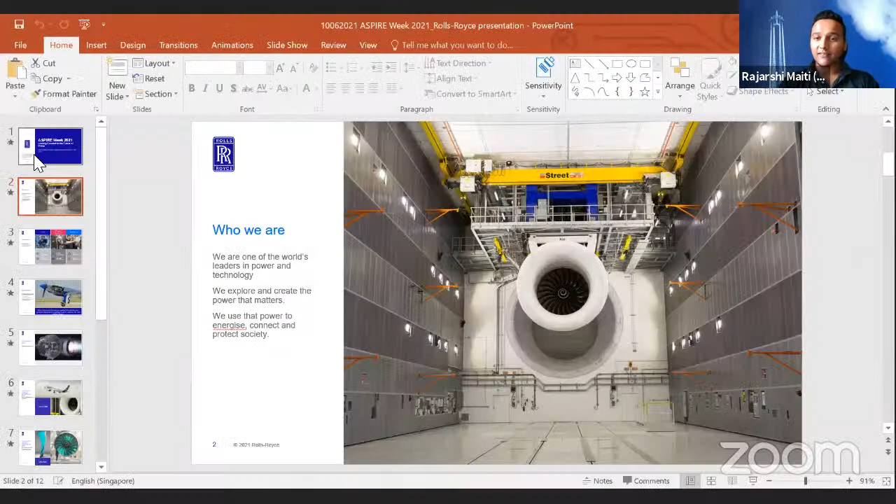I am genuinely excited to share about Rolls-Royce and, more importantly, about the future of flying, because I think that is something that is quite exciting that's going on. First and foremost, I would like to thank Aspire for giving me the opportunity to be here. And it's quite encouraging to see so many people excited in STEM.

And I hope today I can, well, not aspire, but inspire you guys to push forward for a career here. And I will be very happy to take any questions.

So let me just give you a bit more about myself. As you guys just heard with my conversation with Johnson, I joined Rolls-Royce 6 years ago. So I have been working here, and there have been a lot of changes in the things we do. We have moved across technology.

So like we talked about, there is a lot of innovation. But in terms of innovation itself, I think the things that we look at do change, because that's what the need of the hour is. I joined Rolls-Royce as a fresh graduate from NTU Aerospace Engineering, and before that, I was in Singapore for about 15 years.

Okay, so let's get started. Before I move on to technologies, can I just check... actually, maybe it's a bit more difficult, and that's one of the things I really miss about these new times, that I would have been in person together with all of you, and I could ask you all to raise hands. So I'll skip that bit.

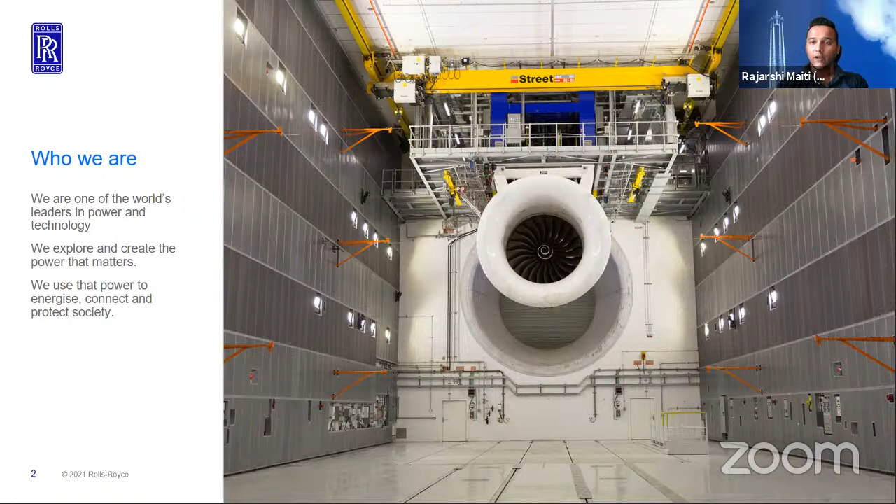On the second one, we have Rolls-Royce Power Systems. These basically provide engines for industrial usage, which means they can be on marine businesses or even industrial gas turbines. So at the core of the technology, it is still generating power, just that that power is not utilized for flying aircrafts, but for other purposes. And finally, we have our defense business, where we engage with the military to provide propulsion for their aircrafts. So that is also one of the other big parts of our business. So that's where we are as Rolls-Royce.

But when we say better power for a changing world, what do we mean by that? The challenge in this changing world is that the activities today are extremely focused on sustainability, on green power, and environmentally friendly solutions. And that is a big challenge. If you know, recently there was the G7 summit, and environmental and sustainability was also a part of the conversation. So for Rolls-Royce, it's always been about making sure we have a long-term strategy to move towards a sustainable aviation future. And that's what we are here to talk about today.

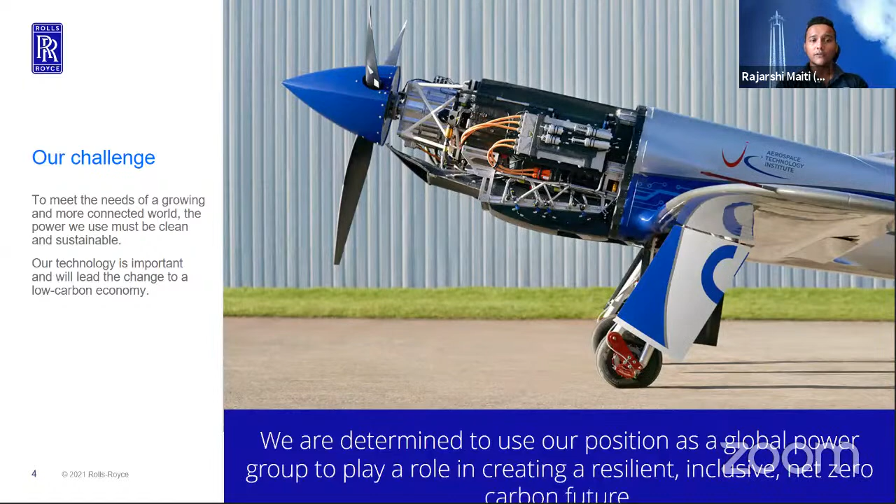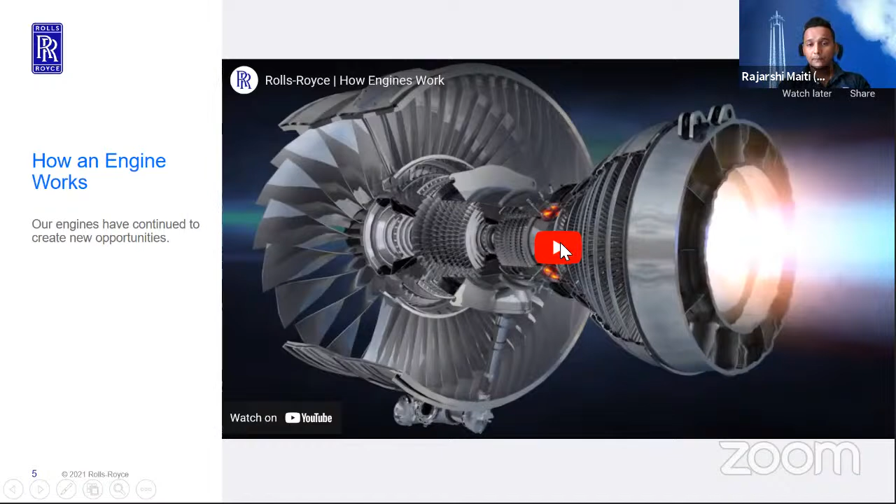So what can innovation do? Answer is a lot. So before I go into that, let me just give you an overview of how our jet engines work. And then I will kind of bring in how innovation is going into this jet engine to make it more sustainable. Okay, so let's take a quick look.

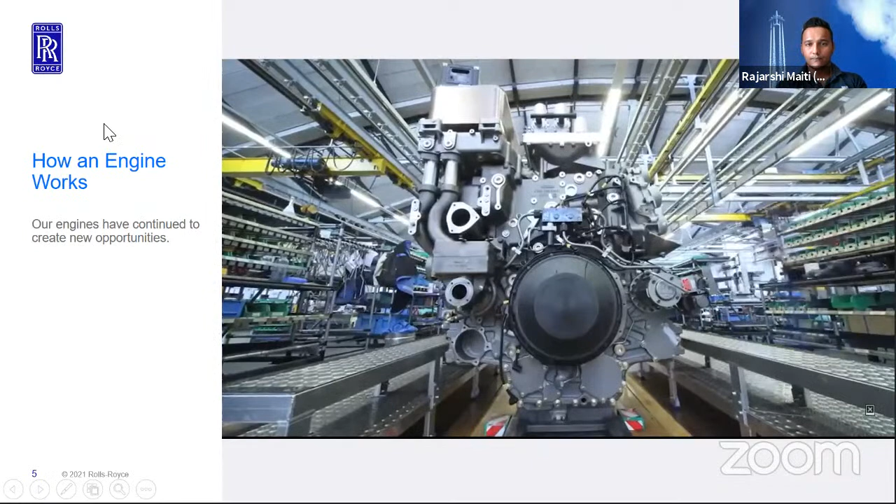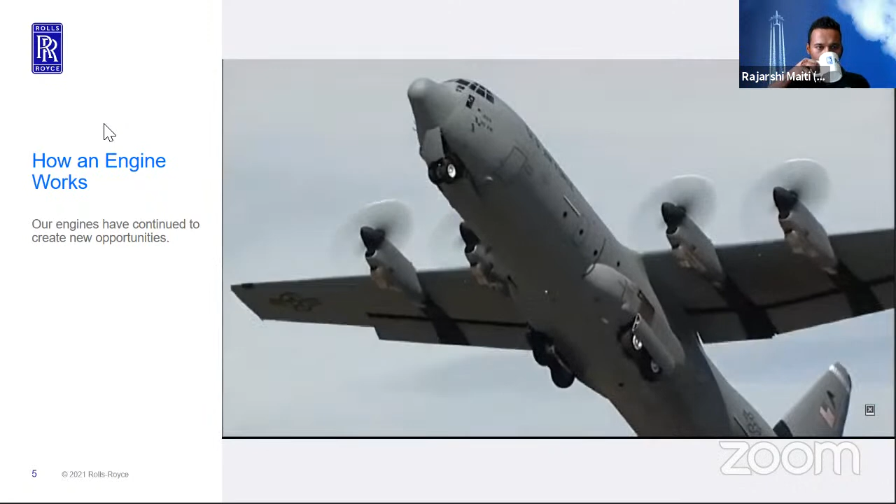Rolls-Royce is one of the world's leading engineering companies, designing and developing high-technology power solutions based on very efficient engines. These are used for applications on land, at sea, and in the air. Our engineering strength is built on two key technology platforms, the gas turbine and the piston engine. So how do they work?

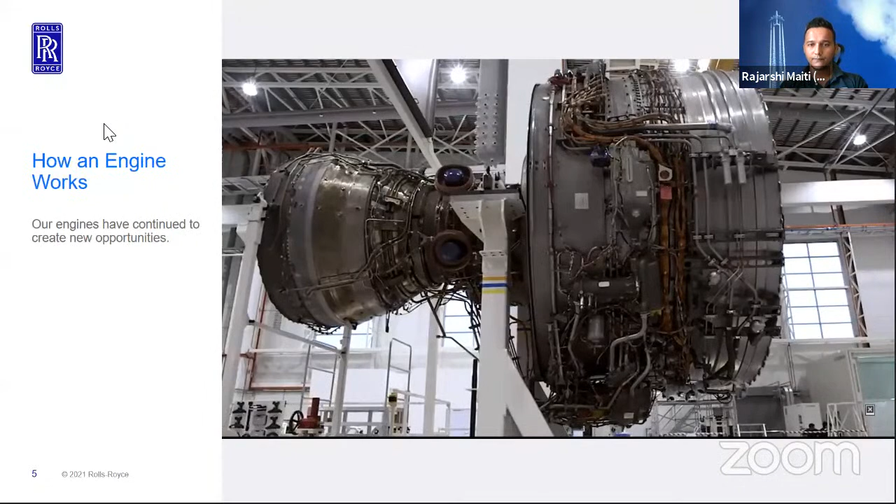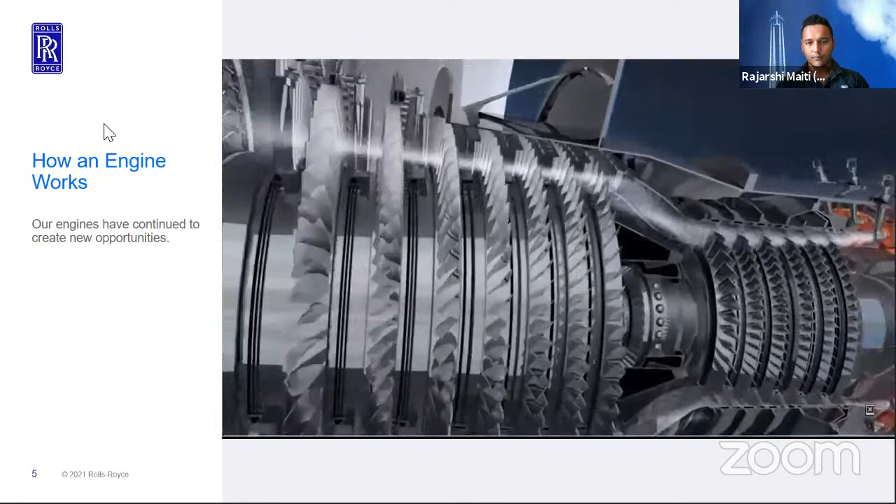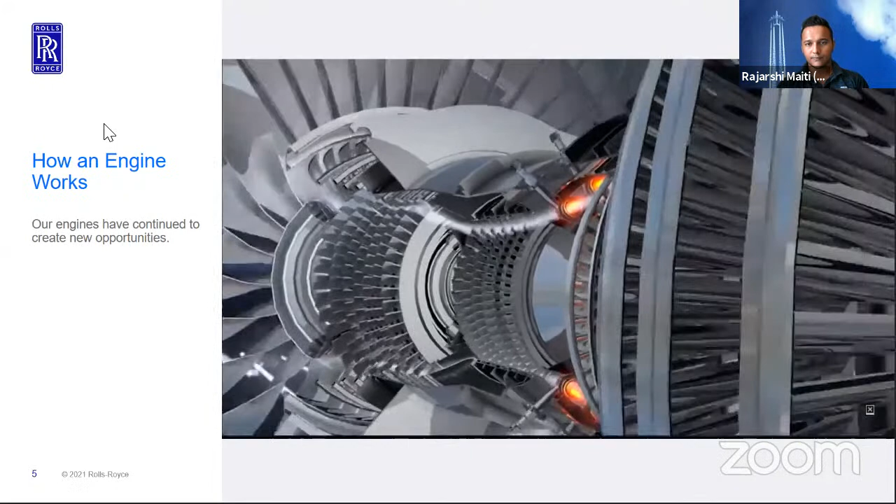In the case of the gas turbine on an airliner, air is sucked in via the large front fan. The majority of the air is directed around the engine as pure thrust. The rest enters the engine and is squeezed through compressors consisting of a series of blades. Pressure increases at each stage as the air is squeezed. In the combustion chamber, the air is mixed with fuel and ignited. The hot air expansion is directed towards the back of the engine, generating more thrust and rotating the turbines, which in turn are linked to the front fan and compressors.

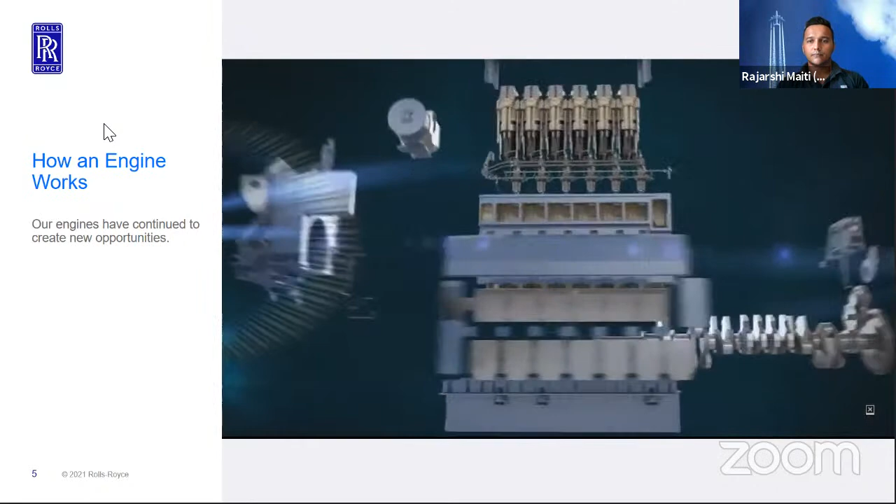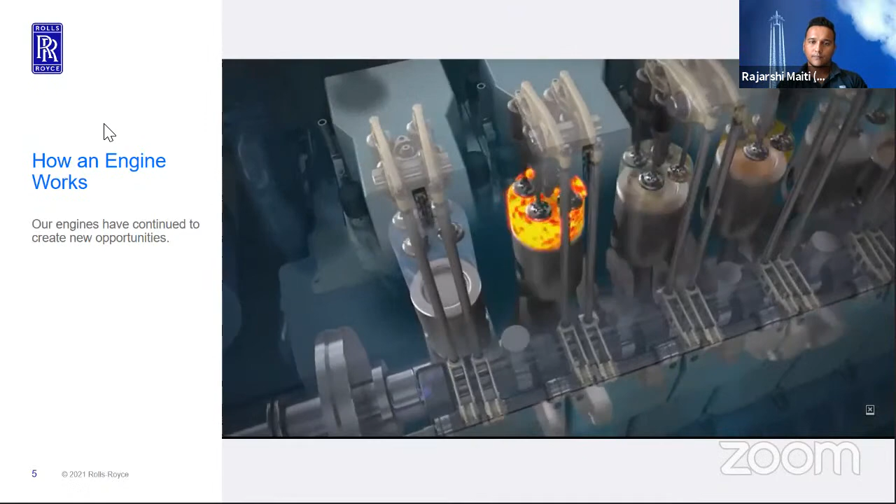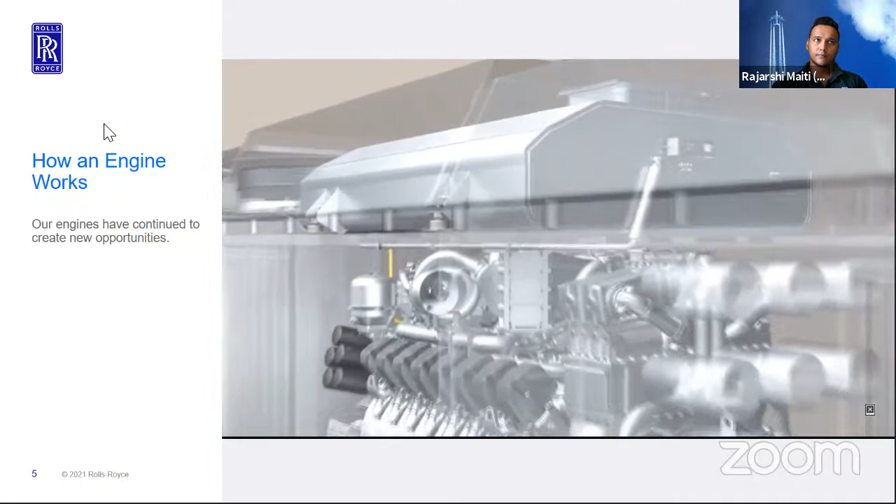A piston engine also operates by air being compressed and mixed with fuel. Air is drawn inside a cylinder, then compressed by a piston and mixed with either diesel or liquefied gas. As the mixture ignites, the energy created pushes the piston to the bottom of the cylinder. The piston then returns to the top in a continuous process. Rods connected to a crankshaft convert the vertical movement of the pistons into a rotating motion. As a result, the piston engine can power a wide range of applications: electrical generators, ships, vehicles, and railway locomotives.

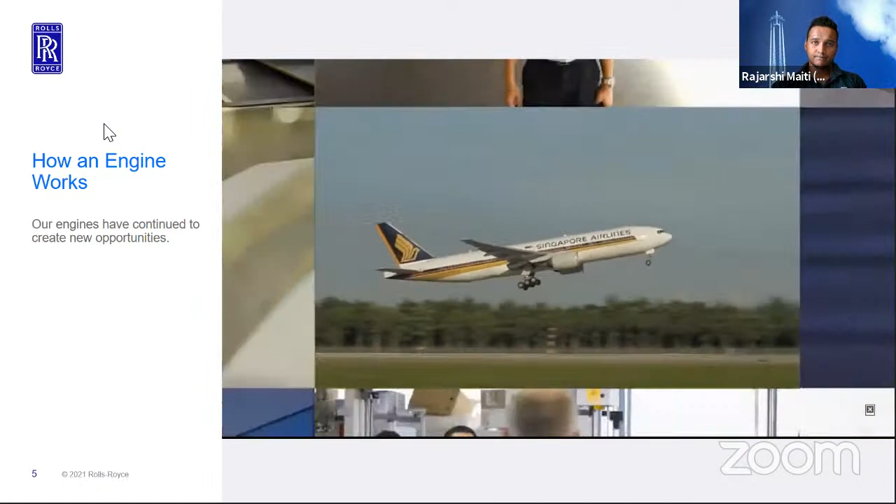Efficient power on land, at sea, and in the air. Rolls-Royce, creating better power for a changing world.

So that was an overview of what Rolls-Royce does, how our engine operates, and this is at the core of what we do. In order for us to deliver these engines, which we have earned as of today about 100 million flying hours, it is important for us to keep at the cutting edge of innovation, because not only are we going to fall behind our competitors, but we are going to fall behind world's industry standards of how a business should operate in terms of sustainability. So let's dig into a bit more on the sustainability.

Rolls-Royce has had many different engines, and most of our engines are called Trent engines. Interestingly, this name Trent is based after a river in Derby, UK, where our headquarters is located. At every subsequent Trent engine, we have provided 10 to 15% improvement in our fuel efficiency, and that has been very important for us to deliver that goal of net zero carbon emissions.

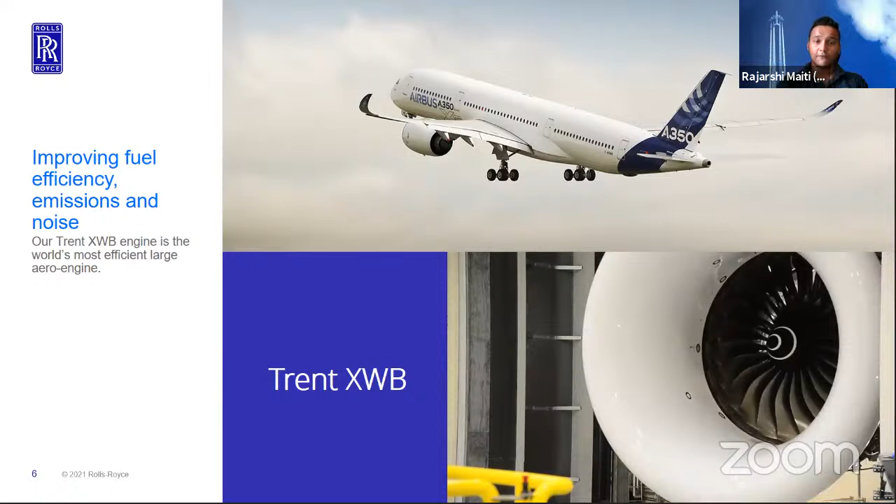As of today, the Trent XWB is one of our most efficient engines, cutting down fuel emissions by close to 15%. And not only that, we are now further innovating to look at how, even at this 15% reduction, we can go even further.

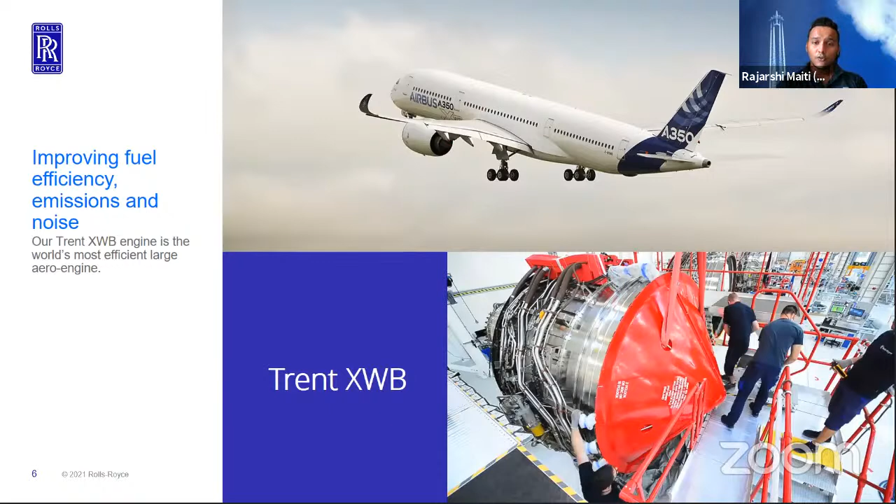On top of that, we have also started looking into our next generation of fans, the UltraFan, approximated to go into service in 2030, which will give even another 25% reduction in our carbon footprint.

So as you can see, development of these engines has slowly started to move towards that goal of having a sustainable engine and reducing our carbon footprint. But there is always this saying that you can only do small incremental improvements, unless you make a very significant change in the way you do things, it's very hard to make a step jump. And it is that step jump we are focusing on for the next few years.

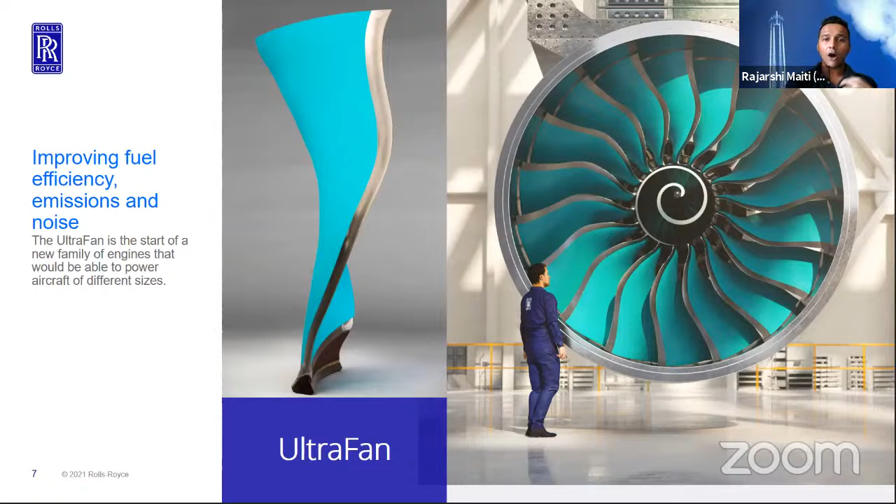In order for us to deliver that step jump, we actually call it almost the fourth industrial revolution in the industry, looking at three main things. Electrification, moving away from the gas turbine engine that burns fuel and rotates parts. Sustainable aviation fuel, or SAF, meaning can we move away from petroleum-based fuels into something more sustainable and regenerable. And finally, digitization, which is important because it allows us to prevent incidents that can also impact sustainability. These are the three main things I will cover today to give you a flavor of how Rolls-Royce is moving towards the flying of the future.

So, sustainable aviation fuels, or SAF. These are very different from our traditional jet fuels. Today, we are at 100% jet fuel utilization. Jet fuel is made from standard petroleum, processed to the grade required for jet fuel. But that means we are utilizing non-renewable resources, which is something we want to move away from. That's why we are moving to SAF, made from renewable resources like cooking oil and bio waste, which allows us to get to that level of sustainability.

SAF is not completely new. It has been used in other industries, like smaller scale power generation, for about 10 years, and even for smaller flights. But we have never used it at a commercial level, and that's where we want to move into.

Rolls-Royce has committed to delivering SAF. As of February of this year, we conducted a 100% SAF-powered flight to unlock the future potential of SAF. We have done this in our business jets because those are smaller jets, and now the plan is to bring this into our larger commercial jets, which will allow us to get to our goal of 2050 net zero emissions.

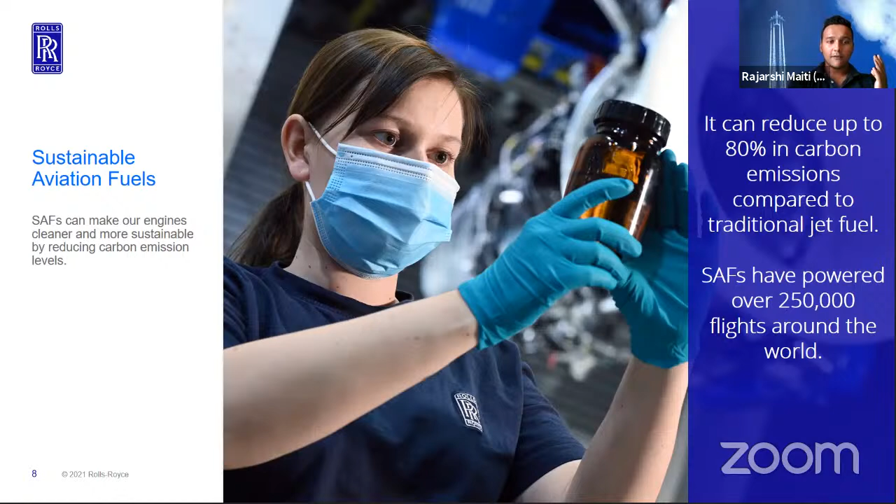And that is where electrification comes in. I'm sure all of you have heard of the fantastic things Tesla has been doing. A lot of car companies are now moving towards hybrid cars like the Prius, or even fully electric cars like Tesla. The reason for that is carbon footprint, because electric cars have extremely little to no emissions.

But as you know, with electric cars the challenge is infrastructure. Just take a look at Singapore. EDB plans to get electric vehicles onto the roads, but right now if you go on Google Maps and click petrol pump, you'll find 5 to 6 petrol pumps within a couple of kilometers. We just don't have that infrastructure for electric cars. So charging infrastructure is not there.

Now imagine that scaled up to the level of electric aircraft. There is a lot of infrastructure work that needs to go on. But on top of that, we need to figure out how to generate enough power, equivalent to what a jet engine generates, from an electric engine. Currently, the challenge is battery size.

Rolls-Royce has been working extensively with a lot of partners to look at how we can tackle this problem and get to a power density that is able to do propulsion on a fully massive commercial aircraft. We are 10, 20 years away from that, but we have made a good start and have started small test flights. Just last year, Rolls-Royce completed its first test flight looking at electric aircraft.

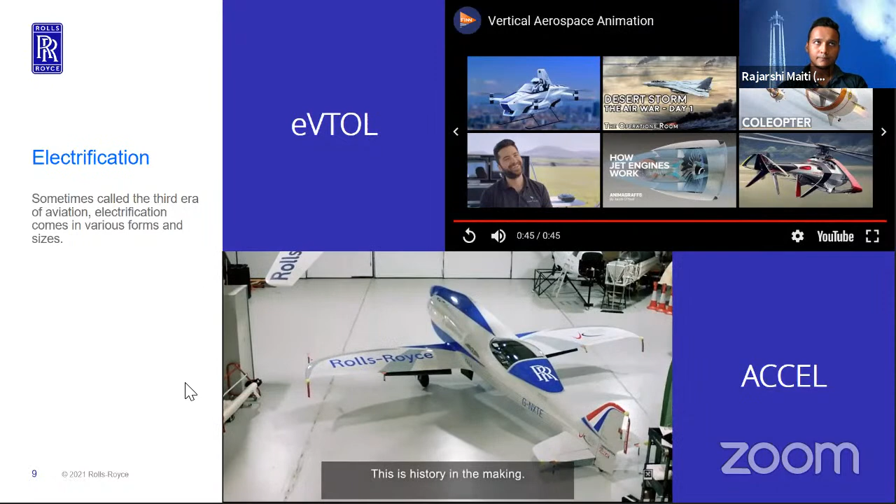This is a key moment in electric aviation where we've produced the aircraft that's going to go break the record. The current airspeed record is 210 miles an hour. We intend with our aircraft to go 300 plus miles an hour. If we can break the world record, electric aviation is here to stay. This is history in the making. High-powered electric propulsion is going to bring a lot to aerospace. This is about how we start to champion electrification in aerospace, showing people what is possible. When we go to undertake the speed record, there are certain rules set about.

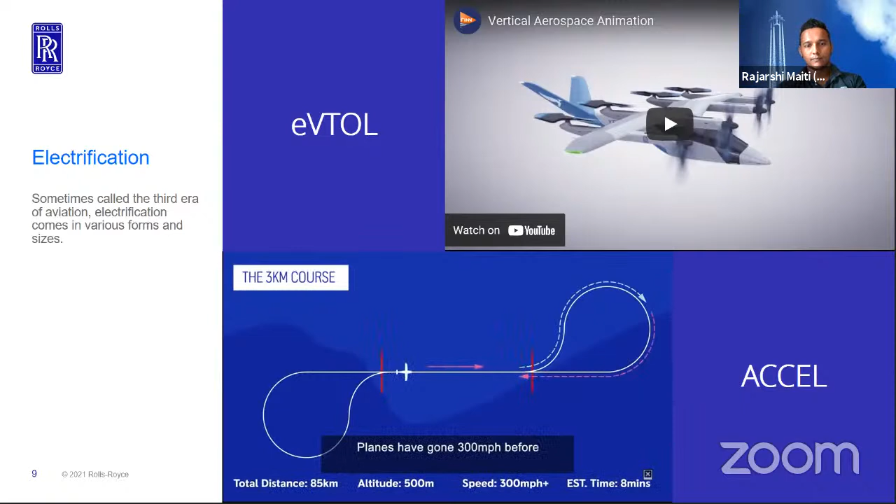This is a key moment. The current airspeed record is 210 miles an hour. High-powered electric propulsion is going to bring a lot to aerospace. This is about how we start to champion electrification in aerospace, showing people what is possible. When we go to undertake the speed record, there are rules set about how you do that, requiring a certain course for a certain amount of time. Planes have gone 300 miles an hour before, but this is the first time doing it in an electric plane, and that offers real challenges.

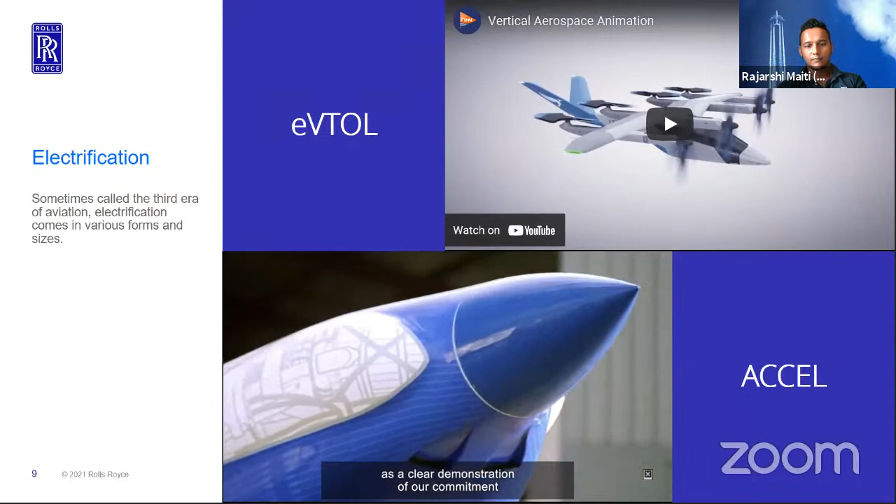We're really proud to be rolling out the aircraft now as a clear demonstration of our commitment to cleaner, more sustainable aviation. It's stunning, and it's going to be wickedly fast.

Wickedly fast. That's the vision. But the challenge is demonstrating this from a single-seater. The next plan is an 8-seater aircraft, a bit like an air taxi, and then scaling it up to a full commercial aircraft.

So this ACCEL program is a live program, and this shows our commitment to cleaner, sustainable, and lower carbon power. A bit on electrification.

This is Rolls-Royce globally, but within Singapore, within my R&D team, we also have a team specifically called RRE, Rolls-Royce Electrical. That team is dedicated towards battery technologies and microgrids, focused on developing, maturing, and industrializing battery technologies to give us the power that we want.

We work very closely with NTU, NUS, and a few other research institutes across the island. We also have a small island just off Singapore, where we have a test bed to demonstrate microgrids. So it's not just that Rolls-Royce globally is doing a lot on electrification, but locally we have a strong presence and a team dedicated to making the conversion from small aircraft to large aircraft that can, in 10 to 15 years, hopefully power our flying.

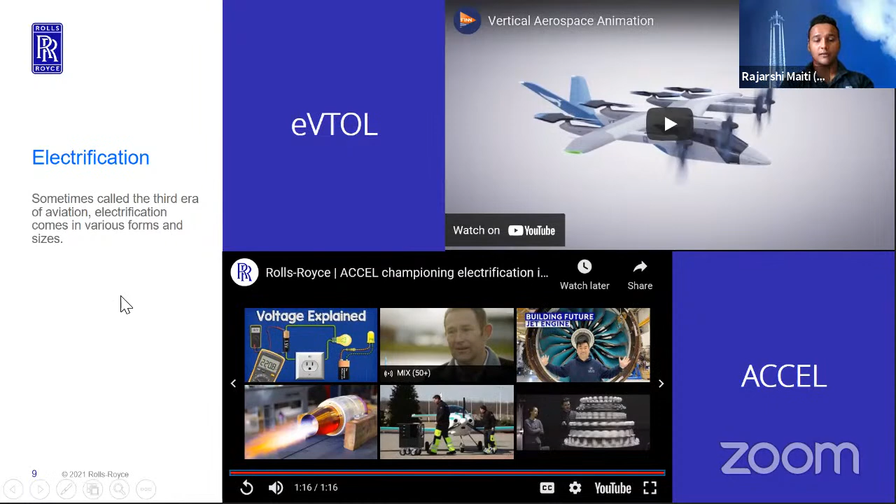So I mentioned three things about the fourth industrial revolution: aviation fuels, so that was on jet engines but cleaner jet engines; electrification, electric engines moving away from jet engines; and the last bit, digitization. You must be wondering what digitization has got to do with the future of propulsion.

That's because today, in this digital age, I'm sure you all have smartphones and have seen a lot of fancy new technologies coming into our day-to-day life. For example, 10 years ago we wouldn't have expected to do such a big event completely online. On top of that, there has also been enormous progress in things like artificial intelligence, AR, VR. I hope many of you have gone to those VR gaming sessions in Singapore, where you play different games while wearing VR goggles. I have been there, and trust me, it looks very, very real.

Now, taking that experience, I want you to visualize how it feels when you're at a VR session. Taking that, we are now applying it to our engines. What we are doing is creating something called a digital twin. So literally, we have an engine that goes to the customer, let's say engine number 10101. We have all the parts of that engine replicated on a laptop, that's called a digital twin. The moment the customer, say Singapore Airlines, takes our 10101, starts the aircraft, taxis, and takes off, our digital twin also recognizes that, based on the sensors embedded in the aircraft and engine, that engine is now operating. We get real-time feedback for anything happening on that engine.

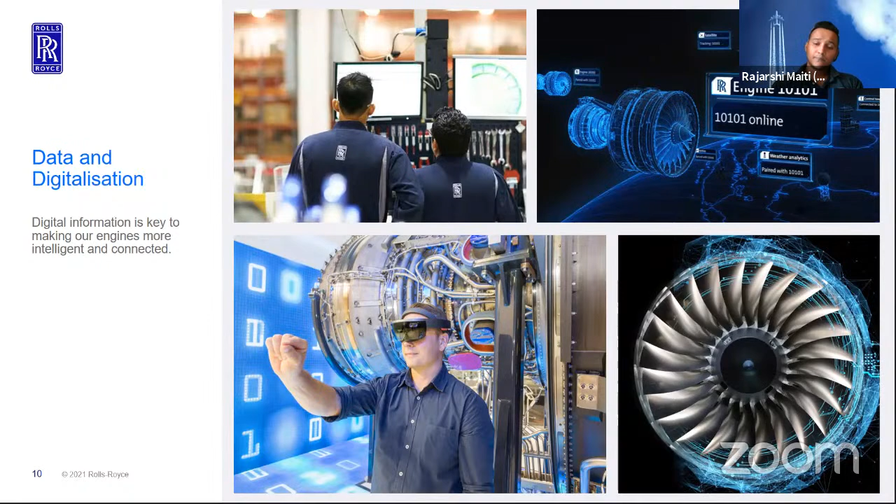I saw this picture and really liked it, because it encapsulates everything I talked about. We want to build a greener future, and aviation has a very big part to play in it. Within aviation, Rolls-Royce also has an extremely big part to play. In order to move towards that greener future, we are looking at sustainable aviation fuels and electrification. On top of that, we want to have a shadow or digital twin of our engines so that we can work with our customers as partners and provide real-time feedback for them. That is what I think the future of flying looks like.

This allows us to have deep alliances. It allows us to build partnerships, and that will bring us to the next level of future aviation. With that, we hope that we can continue to deliver on our mission statement, which is delivering power for a changing world. And with that, that's the end of my presentation. I would love to take some questions and comments from the audience.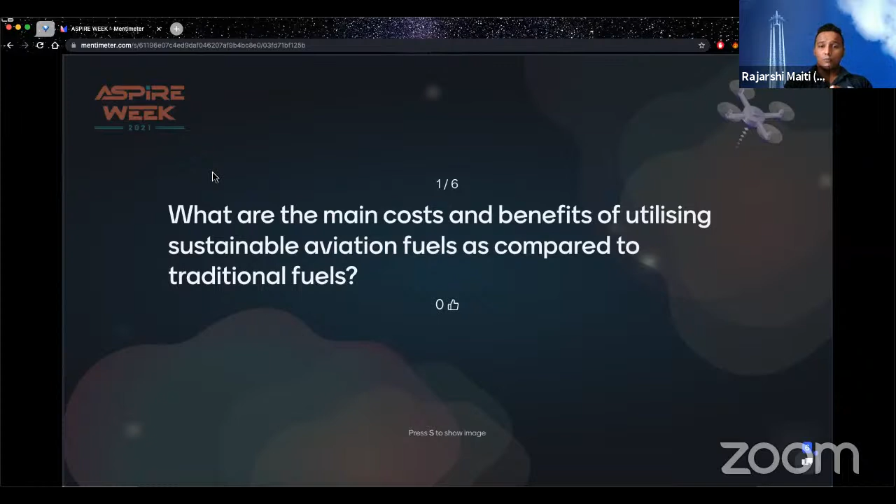The second benefit is that this makes aviation fuel life sustainable, because SAF is made from biodegradable mass, whereas traditional fuels are made from non-renewable sources, and as the name suggests, these resources are getting lesser and lesser as we speak. So moving to SAF, we will have a renewable energy source, and that is the other big benefit. So these are the main costs and benefits, and the benefit outweighs the costs — that's why we've embarked on this journey to develop SAF.

Thanks for the analysis. So SAF is a more efficient source then? Definitely.

How do you ensure zero emissions when utilizing electric aircrafts if renewable energy is less available in countries such as Singapore, where electricity is produced through non-renewable means? Very good question, I'll answer this in two parts.

First part, I'll talk about scale. Rolls-Royce as a company, globally, wants to move towards net zero emission, and in order to do that we have a global footprint. So it is extremely challenging for us to get net zero across the globe. There will be some areas where we are net positive and some where we are net negative, but overall, as a balance, we want to attain net zero emissions. Just to explain the context.

Now, coming to countries like Singapore, electricity production is through non-renewable means when we talk about electricity powering our houses. But when we talk about electric aviation, we're talking a lot more about batteries and fuel cells. These fuel cells are one of the technologies we're looking into — renewable fuel cells, meaning fuel cells generated through renewable means. That doesn't mean we might not need some level of non-renewable means in some places, but overall we want to achieve net zero emission. And specifically about Singapore, I think it's making a lot of strides towards generating electricity through renewable means.

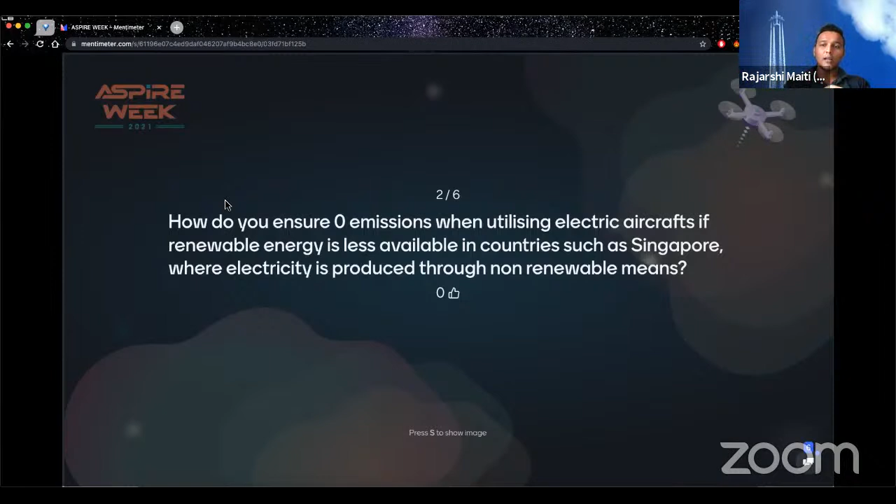We have engagements with the EDB as well as Spring Singapore. One of the key changes I've seen compared to 5 years ago is that in our conversations with EDB and Spring, there's a lot of funding and support available, specifically targeted towards startups and SMEs that deal with renewable sources of energy, especially solar energy. Because if you think about renewable energies like solar, wind, water, Singapore has solar energy in abundance, whereas in some of the colder countries you don't have it for close to 6 months. So there's been a lot of work done with these government bodies to focus on renewable means, especially solar energy, and Rolls-Royce is definitely keen to tap into that for Singapore. Whereas in countries like UK, we might look more into wind-powered renewable energy. So those are some of the ways we ensure we hit our net zero emissions using electric aircraft.

So there's a geographic element to it as well. Depending on which country you're in, you may rely on a different source of renewable energy. Definitely - the UK basically has a 1 week summer, so solar energy is not really the best way to go there.

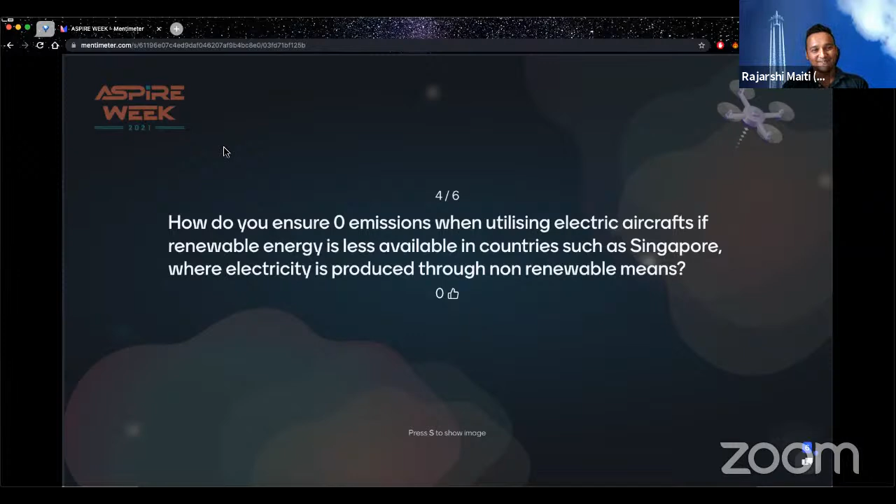Do we have another question?

What was your educational journey like, which gave you an opportunity to work at Rolls-Royce? I think they want to find out a little bit about what your personal journey was like.

I'm happy to hear that question, because when I was given this task, there was a section for self-introduction, but I thought people won't be interested in that - they want to talk about flying future. So I skipped that part. So you want to know how to get into Rolls-Royce - well, happy to share that.

Just for the benefit of everyone here, I am not Singaporean. I came to Singapore in 2005, and then I came here in secondary 3. I did my JC, and then I went to university. I was very, very lucky to get into the NTU Aerospace Engineering program, and I did my 4 years of aerospace engineering there.

But in my team, out of 26 pure aerospace engineers, there are probably only 5 or 6. So what I'm trying to say is aerospace engineering is not the only way to get into Rolls-Royce. As long as you have an engineering background - a lot of what we do is basically core engineering, a lot of the innovation. For example, out of the 3 things I shared, I did not study any of those in my university degree: electrification, sustainable aviation fuels, or digitization. Today, because aviation is changing so much, it has completely opened up to a wide field of learning.

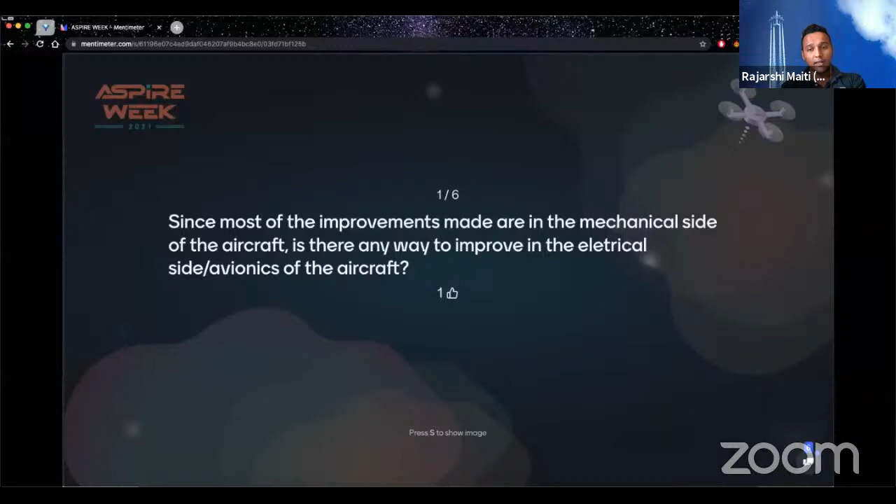So that is the reason most of the focus has always been on improving the mechanical side. Now, I'm not saying the electrical or avionics side of the aircraft is not important, but purely if I'm talking about sustainability, not about making the aircraft smarter or making more money out of it, then making massive steps in the avionics side is not going to have such a significant impact on sustainability or the future of flying. So that's why the focus has been on the mechanical side.